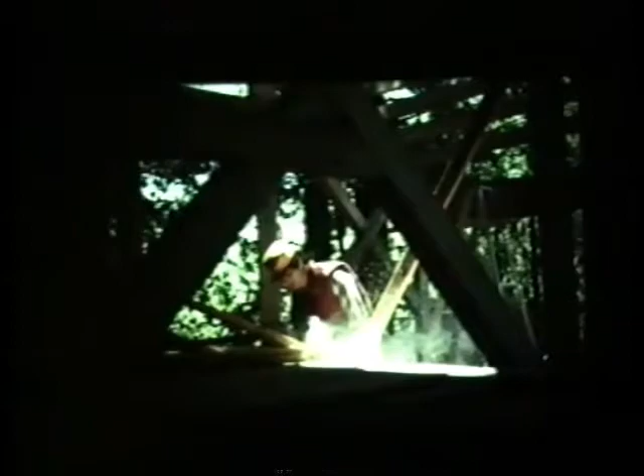I work with a group called Jersey Devil. We're architects, artists, and inventors committed to the interdependence of design and construction. And we maintain a small office, actually just a post office box and a phone machine in Stockton, New Jersey. But we're pretty itinerant, working out of wherever our commissions take us. We do all of the construction ourselves and generally live on the site, either in trailers or crew-built structures.

These are some of the first buildings that we built. In the 60s, this is what we thought the future of architecture was going to be. Lightweight, air-supported structures, easy on the pocketbook, easy on the landscape, incredibly high in fantasy content, either the thinnest of skins between you and the outside, or hermetically sealed in an alien envelope. And it was a fabulous fantasy, but it was a fantasy that was fueled by cheap energy. Enormous amounts of air being blown in these buildings to keep them up, and enormous amounts required to heat them and cool them. So what we tried to do when we graduated from school, we built most of these structures during school, was to retain the spirit of these buildings in a more energy efficient package.

This is the first building we built right out of school. We never did an apprenticeship. Maybe you can tell.

It's a little house near the beach, so it's shaped like a snail. In the center is a tower built out of manhole risers stacked with a crane. Off-the-shelf laminated barn rafters spiraled around it, sheathed with cedar, and then sprayed with about 4 inches of urethane foam, which is then plastered.

And we didn't know totally what we were doing. We did some intelligent things. We did the insulation on the outside, which is good. Didn't know that. It is good. And we used spherical forms, which is an efficient way to enclose the space. You can just about heat this building with a candle.

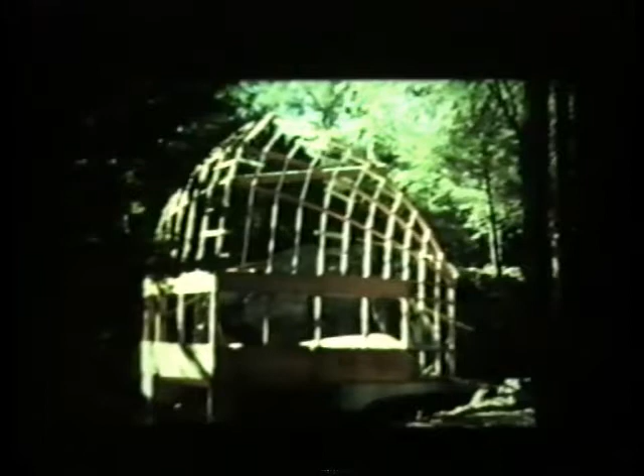And the site, which was picked by the client, is a giant granite rock outcropping that gives a really organic quality to the interior. It's basically taking these barn rafters, again, that are used to build agricultural buildings in the Northeast, linking them up in pairs and then just tipping them over this boulder just like a huge slinky.

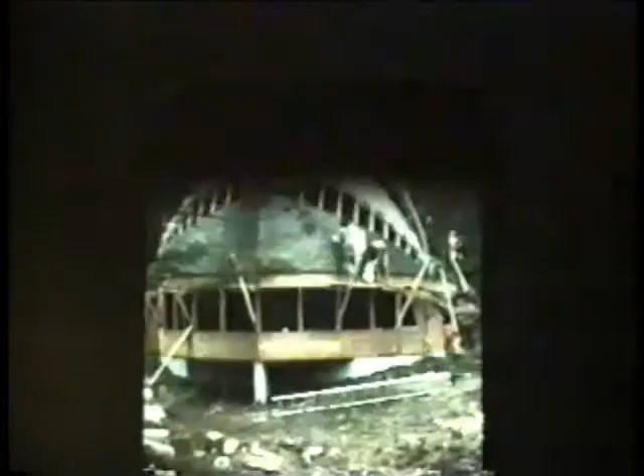Then it's covered with Homosote. It's a building material made of recycled newspapers, closed cell styrofoam insulation, a layer of chicken wire, and then a thin coating of ferro cement, which is used in the boat building industry, a very cheap, durable, and strong way to enclose this structure. This is the interior, which is pretty non-standard and client-specific.

The fireplace, your most basic, primitive, caveman, hearth-like situation. These will be the stairs going up to the upper levels of the living room. Bathroom. He didn't want interior partitions, so when we got to the bathroom, we were able to achieve a little bit of visual privacy, but not a lot of acoustical or olfactory. And finally, at the top, the master bedroom. He saved a lot of money here by doing his own interior decorating.

You might wonder, there's not really any building inspection or building codes in New Hampshire, just the septic system is inspected. And there's a final view of the house on its wooded site. We finished this in 1974, over 20 years ago, and it was the first building we got some national publicity for. Architecture magazines never did anything on it, never have, actually, except in Japan, maybe the samurai. But Popular Science did a little piece, and the National Enquirer gave it the Weird Home Award, 1978.

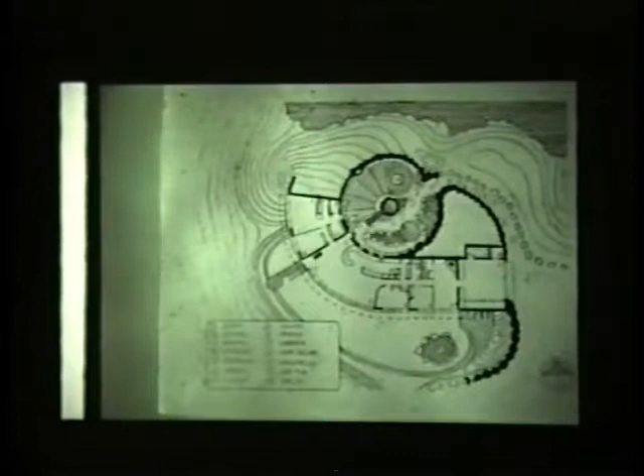The parents' wing at the top with as much public space as possible in between, opening out onto a courtyard on the north with a little vegetable garden on the south. And the section is just like an extrusion with end conditions. Basically,

there's panoramic windows to the south and below, which the sun comes in and is stored in this masonry floor for passive solar heating. There's an overhang which blocks the summer sun and keeps it out, the high sun.

We take advantage of the slope on the site by putting in this trombe wall, which is a concrete wall behind glass and fiberglass here, so that by natural convection, the cool air falls behind the wall and goes through vents and is heated. The sun comes up to here where you can either bring it in for solar heat or vent it, which induces a cool breeze through the building.

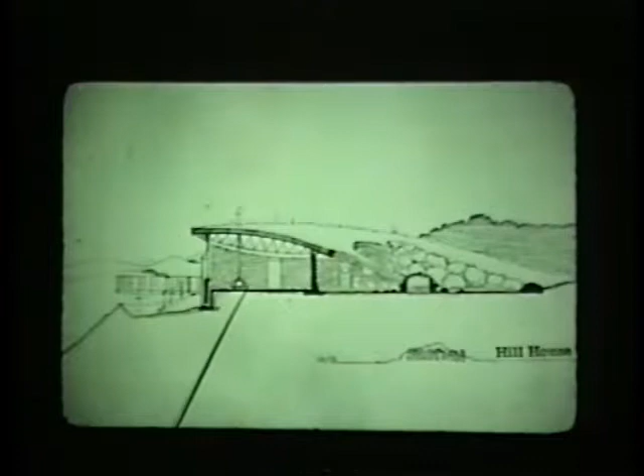And he's got a little wood stove with some backup heat, but he basically burns that for atmosphere. He's never used any electric heat in the building. And some construction shots. This is the trombe wall formed. The vents are there. The utilities are going in under the slab, pouring the slab with an overhead pump truck.

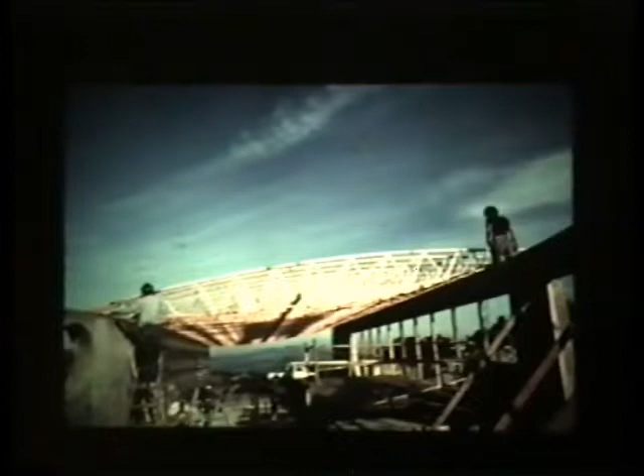Here the concrete's been poured, and we're using the old form boards to build a curved box beam around the south side of the building. And the roof is, these are truss joists. They're just out of a catalog, that particular shape. It's a lenticular form. You give them the span, the load, how fat you want them in the center.

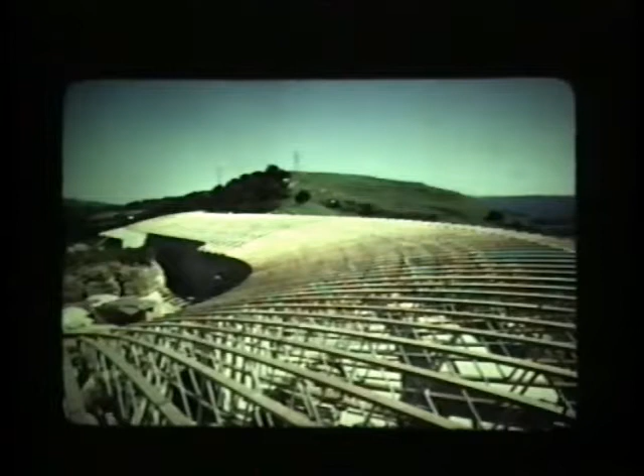Computers design the trusses, robots assemble them in the factory, ship them out to the site. You can put them up in one afternoon, and you have a very strong compound curved airplane wing form that's resistant to the wind loading and sympathetic to the rolling hills that go down to the ocean from the site.

And it's covered in pine decking, then a plywood diaphragm for shear, rigid insulation, and then a very high quality hot mop roof with extra gravel and actual drain tiles built into it. If you're going to build an underground building, you better do a pretty good job on the roof because a callback can be pretty expensive.

And then we loaded up with dirt. There's 4 inches of road base, 4 inches of topsoil, and we were a little nervous about taking a bulldozer up there, so we did it all by hand with wheelbarrows. But when we finished, there was grass on it. One day we found about half a dozen cows up there. We could have saved ourselves a lot of work.

And then we seeded it with winter rye, which takes root very quick and holds all that dirt in place, and then the native planting takes over, which is clover and wildflower. This is a great example of what's possible if the architect is on site as the builder rather than back in the office. This is the architect here in the green shirt, my partner, Jim Adamson, and the excavator,

Jim Dempsey. Jim Adamson and I had some walls on the plan, and we had planned to pour them in concrete and veneer them in stone. And Dempsey was having lunch with us, and he said, why don't we just take some of these giant boulders on the site and make the walls out of them? And it was a fabulous idea. And I think he suggested it because he enjoyed the challenge of that type of work and wanted another couple of weeks on the job.

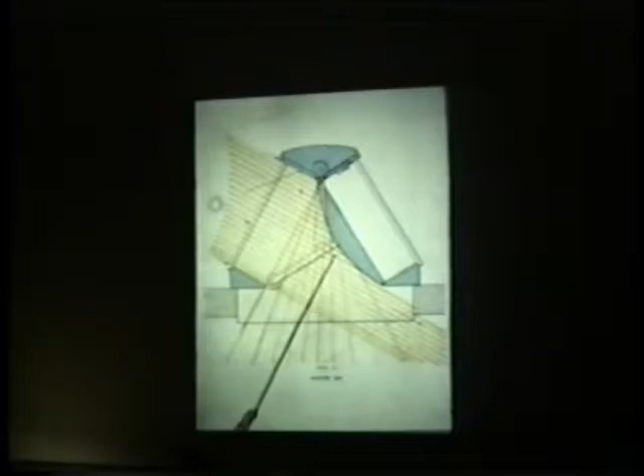If you can imagine a skylight with glazing on the south and on the north, maybe 16 feet long, a convenient length for glass, and with an insulated panel with a reflective skin which is center pivoted and counterweighted, so that it takes a tiny, maybe 1/2 horsepower motor to turn it, turns it in a circle, and seals tightly.

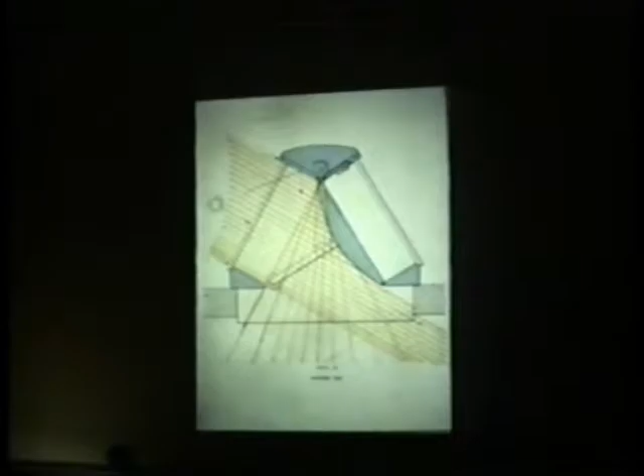You can connect this thing to a photocell, so that on a winter day it'll automatically open when the sun comes up, and the low winter sun will be reflected off that curved belly. There'll be a nice even spread of light and heat in the building. And then at night, when the sun goes down, the photocell tells the rotolith to close, and it closes and seals tightly and becomes an insulated ceiling rather than a skylight, which allows all the heat to go back out through the roof.

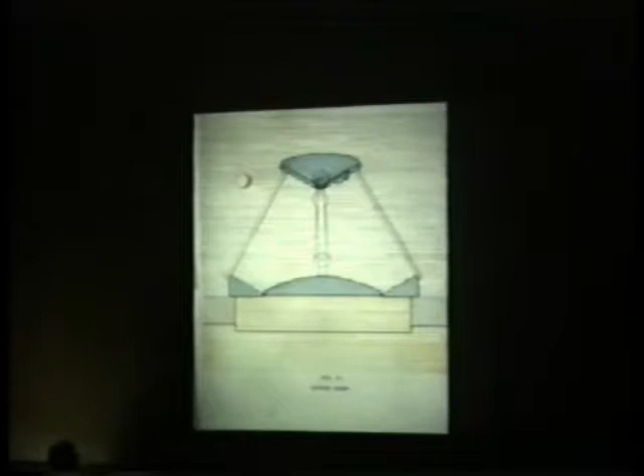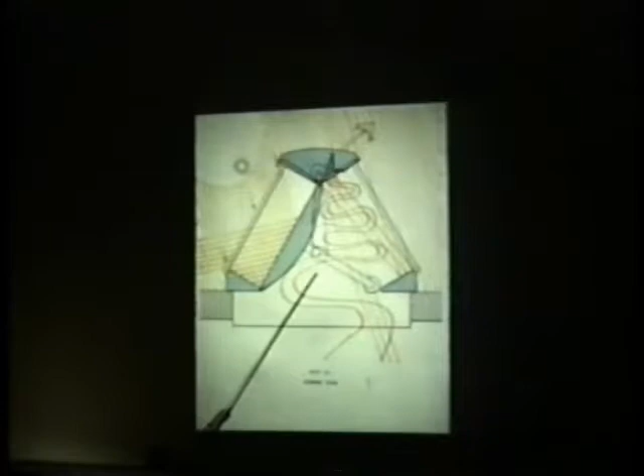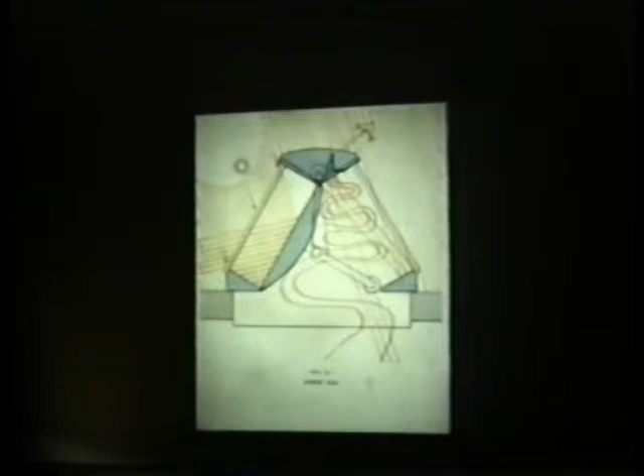The third position would be the summer mode, where it moves here to block the high, hot summer sun, which you don't want in the building, but allows for north light, which is reflected light without heat. There's a vent at the top there, this heat-sensitive vent that begins to open at 85 degrees for natural ventilation, so you have heat, light, and ventilation in one package, in what is actually a skylight, which is normally just a leaking energy loser.

And Jim got not only a patent, but he got a grant from the Department of Energy in the Jimmy Carter years that they were giving for solar to build a prototype, and he built it, and then Ronald Reagan came along. But in the mid-'80s, he got a chance to use it on a caretaker's house for a collection of buildings that we built in Virginia.

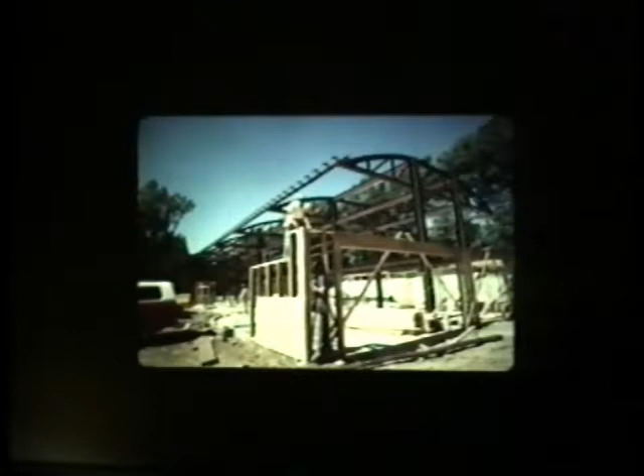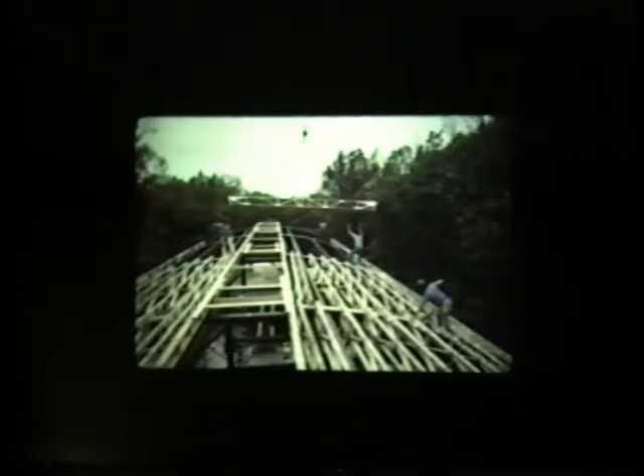And this is the steel frame put up by union ironworkers under our supervision, and then we're starting the non-bearing wood layer down below. And we switch quickly to wood, send home the ironworkers, and bolt a 2x8 to each one of those trusses. They're 20-foot center bowstring trusses, and then this is putting in the purlin trusses, which are just standard manufactured 20-foot long. You do all the layout, call the crane, set all the trusses, have the crane bring all the plywood that's needed up onto the roof, put down all the plywood, this time with a nail gun. Basically build the roof first, so that it's dry in there and you don't lose any time closing the building in before winter, because the lower level framing is much more complicated, but it's non-bearing, so it can go later.

And I went to the quarries along the Potomac to select this stone, and I brought some Frank Lloyd Wright along with me to show the stone guy the kind of thing I was looking for. And he looked at the books and he said, "No problem. I'll just send out the Fallingwater package." So you can try this. The spec, I think, you put it in. You get nothing bigger than 3 inches, all totally horizontal, completely variable. It works out great.

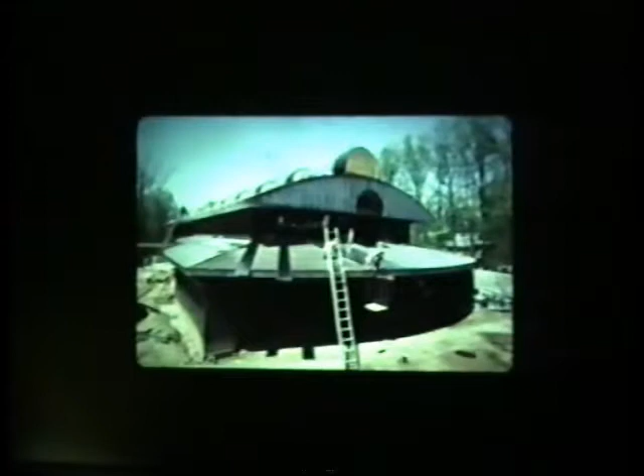And this is the interior framing. Basically, the roof is pretty standard, uniform, monolithic, designed to shade the building and not leak. But the inside is sculpted to take the light from that skylight and reflect it down into the depths of the building. And that interstitial space in between the roof and this form is used for extra insulation without extra structure, and this network of pipes and ducts that we seem to need in a lot of these modern buildings. And the roof, fascia, and soffit, everything that wears out first on the building, is covered in terne-coated stainless steel with a standing seam, which allows for expansion and contraction without exposing the fasteners. You're probably talking a 100-plus-year roof here.

The skylight sections are prefabricated and then installed with a rental crane, and then the glazing goes in on site. We glaze it with two layers of acrylic plastic. The siding is cedar bevel siding. If you ever try to wrap that stuff around the curve, you know that it won't quite lay flat. It's like a boat. You have to recut each piece. Very labor intensive, but I think essential for this project, which is so huge; the thing that helps it retain a little bit of scale is its horizontality.

And that earth berm that covers most of the first floor on the north side also helps to break down the scale. Where the flags are on that berm, we drill a series of wells to tap into the geothermal energy of the earth to run water source heat pumps for heating and for cooling. And there are not many windows on this north side, but there's a few egress windows required on the second floor in the kids' bedrooms, and they're scooped out towards the northeast for some morning sun and privacy and for stream lighting.

The south side is much more generously glazed. These are heat mirror windows, which reflect towards the warmer side, so they cool in the summer and heat in the winter. There's a big mahogany intake louver that ventilates the roof.

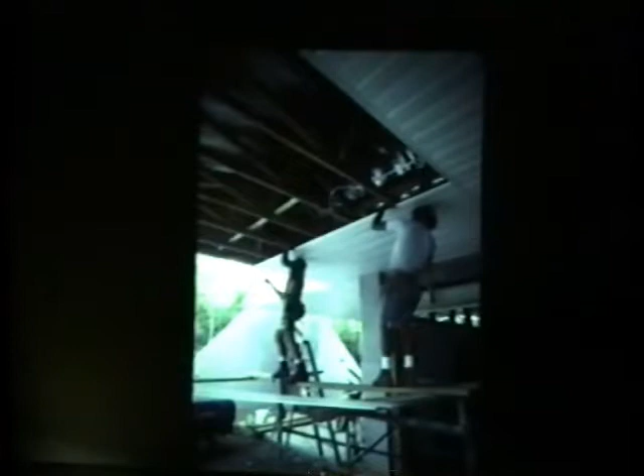And then wood, everything in South Florida is built out of trusses. It's by far the cheapest way to go. They'll build any shape for you. This house is as well. It's cheap. You sacrifice some quality, and also the wood rots very rapidly in the tropics, so the whole thing has to be covered. So the upper level of this entire building is skinned in metal. This is the soffit, which is those little snap-in panels you see on 7-Eleven convenience stores. And in the attic, you can see some foil, like aluminum foil.

Basically, what this is, it's called a radiant barrier. And NASA discovered this for the space program. The Florida Solar Energy Center tested it and found that it would knock 95% of the radiant heat, which in the tropics is basically all the heat, back out through the roof if you vented it properly. So we have radiant barriers in all the roofs and a lot of the walls. And there's a galvanized roof, corrugated aluminum siding.

This is your sectional program: the shop on the lower level, studio above, a little apartment between, screened porches as thermal buffers on the east and west. They're basically part of the house, all with a very short heating season, which is about 3 weeks in the winter, and an exterior stair to connect them. There are big overhangs for shade.

The siding is run horizontally to emphasize the cantilever. Even the ridge beam cantilevers 11 feet, with little lamp light fixtures on either side. There's a very strong emphasis on the horizontal as a counterpoint to these towering pines on the site. And the building is ventilated through these oversized jalousie windows. You don't need air conditioning, you don't need double glazing. The skin is ventilated through these off-the-shelf louvers, and there's a layer of foil in there, so it's like a spacesuit with air constantly moving through it to keep it cool.

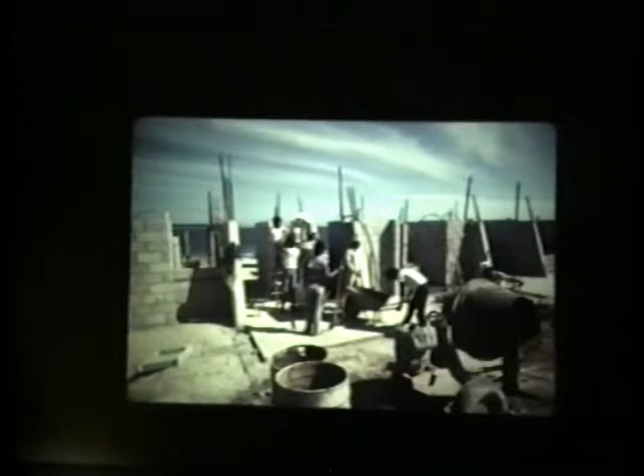You need a courtyard because you're going to have neighbors, and then there's a forecourt, and then you need a roof over the storage area and carport, mostly for shade, and everything needs to be made out of concrete because there's basically no trees in this part of Mexico and most parts of Mexico, and there's a lot of termites.

Cement comes in bags by ferry from the mainland of Mexico, and all the villages have little molds where they can make concrete blocks, or mix it in gasoline-powered mixers on the site. Basically, it's a concrete frame with a block infill, the way houses are built in a lot of places in the world. It's something that everybody knows how to do.

It's a culture where everybody still builds their own house. And this is the technique that they use to do it. These are not professional construction workers. They're basically kids that were fishermen from the local village of El Cardonal who worked with me on the project.

Wood is very precious and it's used over and over again until it falls apart. Here we've got enough of it together to build a formwork for a beam. We're mixing concrete in the mixer, we're passing it up in buckets.

Steel is subsidized in Mexico, and we were able to get some of it for the roof false work, built a jig, and Carlos and Canaro welded up 72, hopefully identical fish-shaped trusses. Each one was painted with anti-corrosive paint, hoisted by hand up to the roof, where they span from this vaulted beam in the center to the flat ones at the edges.

And so by using identical structural components, we're able to develop this warped palm frond shape that sheds the water to the sides. Then you just rivet on some galvanized sheet metal, add the reinforcing, and then with the mixer running from about 9:30 in the morning to 10:30 at night, 35-man bucket brigade, we pour the roof with one monolithic pour, followed, of course, by grande fiesta, mucho cerveza, Spanish.

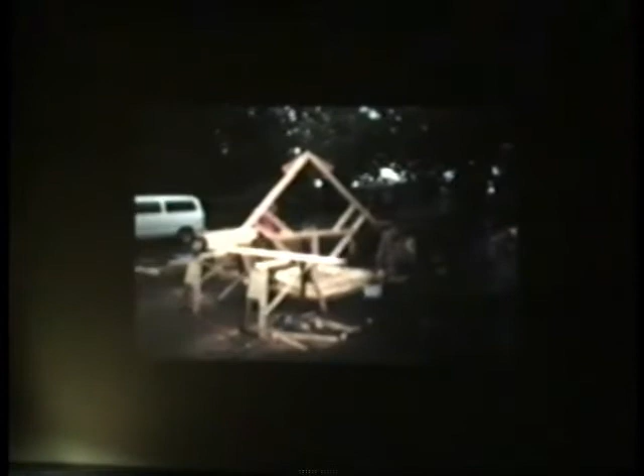I wanted to show a couple of photos from the current project which we're sort of in the process of doing. We started October 1st. It's a play structure for Denise Louie preschool in an Asian neighborhood of Seattle. It's a Head Start program, and we decided to build this giant dragon that kids can play in.

And two of my friends from Vermont came from the Yestermorrow school, Joan Heaton and Dave Robinson, and we committed to doing it. We set up a little jig. This is a section of the dragon's body, basically. He's got this diamond-shaped body with a floor in it.

It changes as it goes through. These are some legs being fabricated. Just process slides. Those are his front legs and his back legs, and all the body sections kind of lifted up there. We built a beam between, and then slid them all into position.

So basically, our build slices through this dragon. It's a pretty good size, about 14 feet tall and 70 feet long, if you count his tail, which we're building here. And the tail is the way the kids go up into it. And it's painted with gold paint, the same color as kind of a bad Chinese restaurant.

Well, there it is, the tail. And then we installed the red circulation spine through it, and a big kind of spinning turbo slide that comes out of the mouth there. That's what it looks like inside.